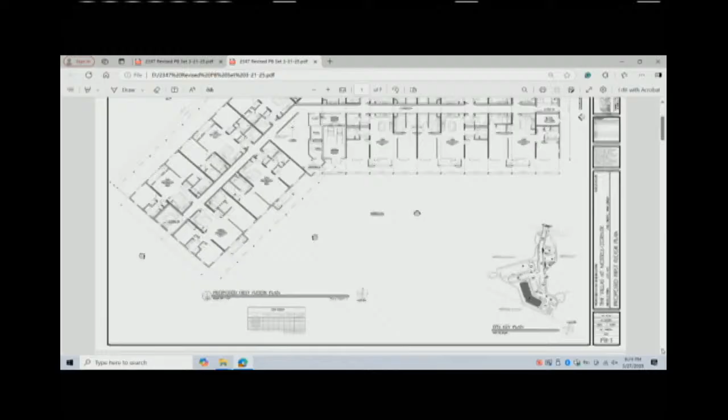We'll go to the next floor, please. The next sheet. Right in here is that trash room. You can see this trash room is a fairly large space. It has 2 trash chutes to allow for garbage to be brought down. Larger items such as cardboard boxes would be typically stored in this room and taken down separately by the maintenance person. There's a centrally located elevator that makes ease of access to both wings of the building.

There's a large open community area in the center of the building with access to it. All of the units are handicap accessible. The entire building is handicap accessible, ADA compliant. The elevator is a stretcher compliant elevator, for ease of emergency personnel to move patients or people in and out that are incapacitated. You have a 3-bedroom unit over here, a 3-bedroom unit over here, and the mix of the units is all interspersed throughout the building.

We do have a total of 14 affordable units throughout the site. The 1-bedroom units are approximately 759 square feet. The 2-bedroom units range from around 1,230 square feet to 1,460 square feet. And the three-bedroom units are approximately 2,040 square feet. So each of the units have open kitchens, large living spaces, more than adequate size bedrooms, very comfortable living areas throughout this building as well as the next.

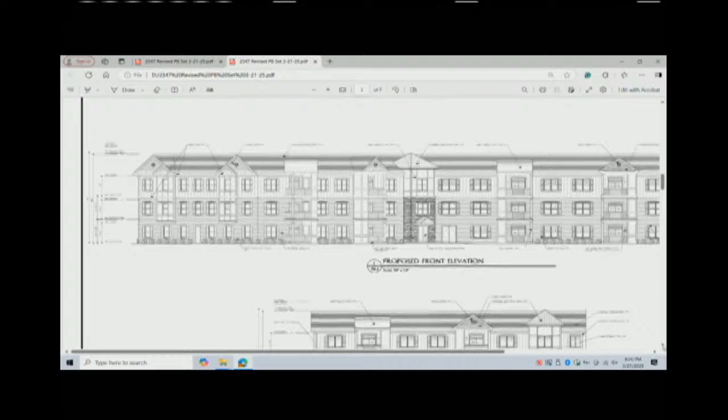This is the facade facing Madison Crossing. As you can see, very similar with the different breaks of materials, different color tones, all in the earth tone palette. We have the recessed balconies in here. And someone had asked a question about the air conditioning units. In these little areas here, these little closets per se on the balconies. And inside those closets are heating and air conditioning units, typically called Magic-Paks.

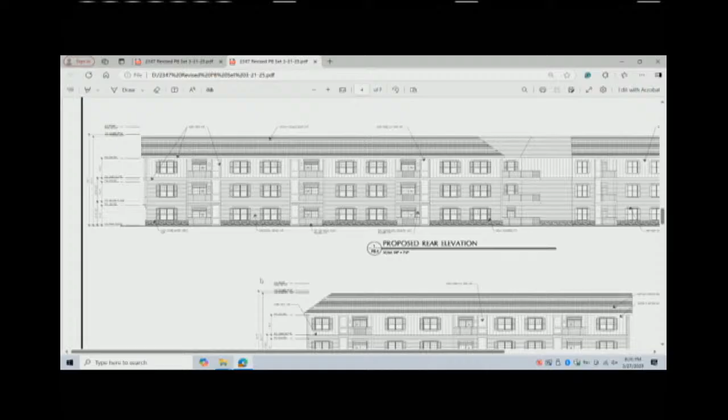They grab their fresh air from here. They're not unsightly. It just has a louver or a grill on the face of the wall that's painted the same color as the face of the wall, and it blends in with the facade. All 4 facades, again, carrying the same colors and materials throughout. This was building 1 for everyone. If we could scroll to the next building, please.

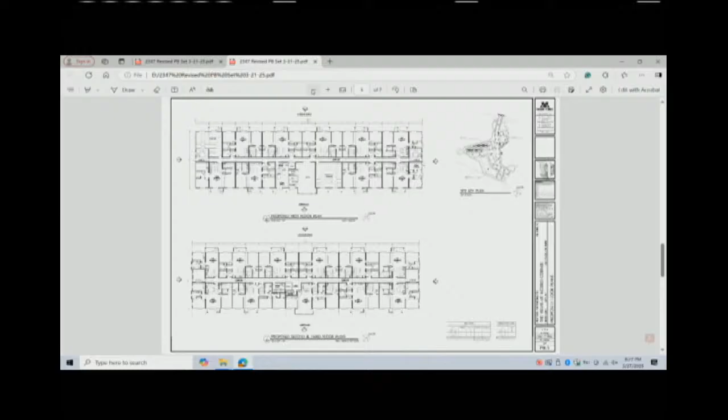And here is building 2. As you can see, it's just a standard rectangular building as opposed to the L shape. This is located on the western portion of the property. And this building here is approximately 54,434 square feet. There's 18,250 square feet on the ground floor, 18,092 square feet for the 2nd and 3rd floor. This building contains 31 units, where the other building contained 39. We have 2 one-bedroom units here, 20 two-bedroom units, and 9 three-bedroom units.

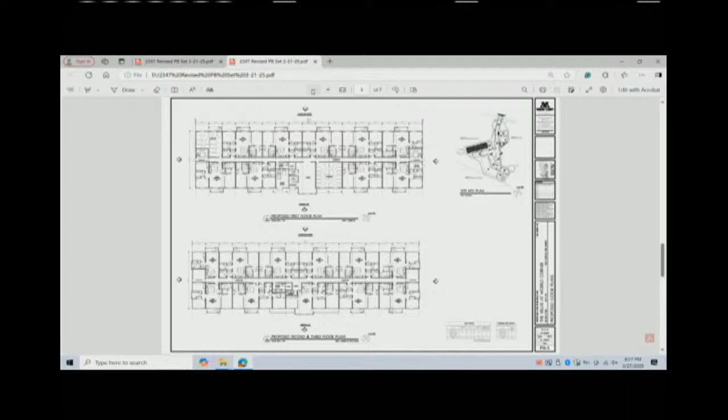This building, if we could just zoom in here, please. This building also has a centrally located entrance at the ground floor, adjacent to a mail room, package room for the occupants. We have a large lobby area for lounge space for the occupants to come down, use their computers. We have a centrally located elevator again to access both wings of the building. And what's different here is we also provide 32 storage units. So we have approximately 16 bins here, 16 bins here.

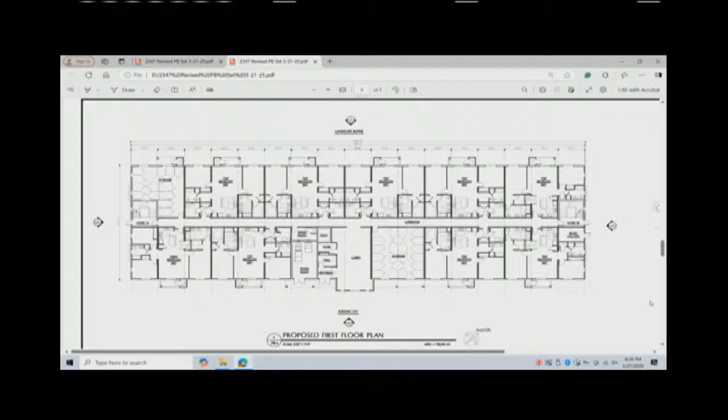Again, this building is fully sprinklered. It's fully handicap accessible. All the units have been designed to be handicap accessible, as well as all the amenity spaces. If we can just scroll to the next image, please. And again, you can see this building is the same architecture. We like to call this a modern colonial appearance, where we have a lot of colonial elements incorporated using multiple different building materials to give it a more modern and contemporary look and feel, yet still being contextual with the rest of the Township of Old Bridge as far as their style of architecture.

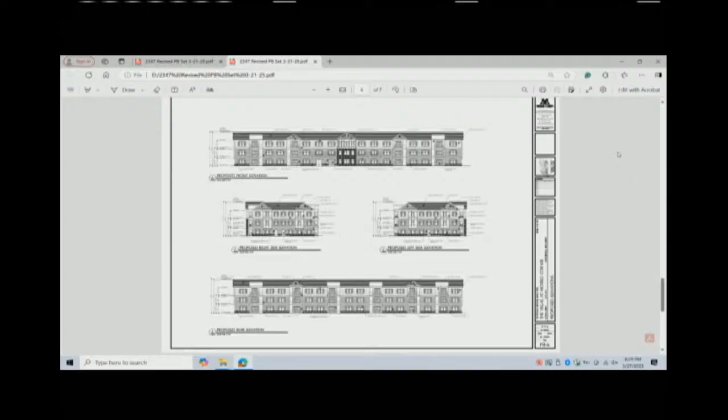As I had indicated, the highest point of this roof is 41 feet 7 inches. And the unit sizes are all the same. It's 759 square feet for a one-bedroom, 1,230 to 1,460 square feet for two-bedroom, and 2,040 square feet for three-bedroom. If you can scroll to the next page, please. And the third building on this site is the clubhouse, which is located at the northernmost part of the property here. Can we just zoom into this plan, please?

Can we just zoom into this area? Wherever you'd like to zoom in is fine. So this building is an amenity to the community. This building will be used primarily for the residents. It will not be rented out. This will be just used for the residents of the community.

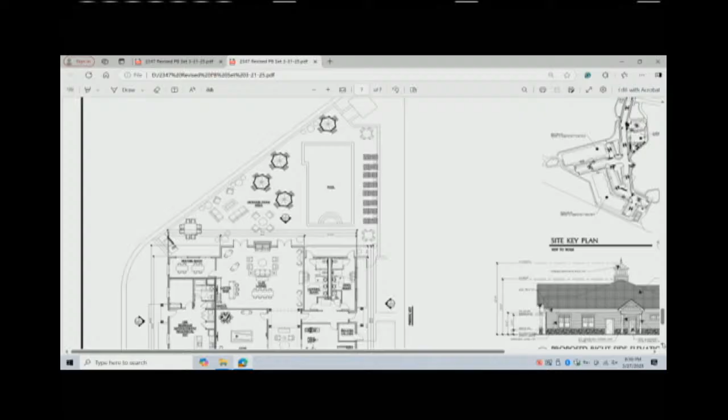This building is a one-story building that is 4,834 square feet. It also, in this area, contains a one-bedroom unit. This one-bedroom unit is for the on-site maintenance person that's going to be living here at all times, so that way he's on site if he's ever needed for any purpose. Can we just scroll up a little bit so I can give a little more of the amenity? Thank you.

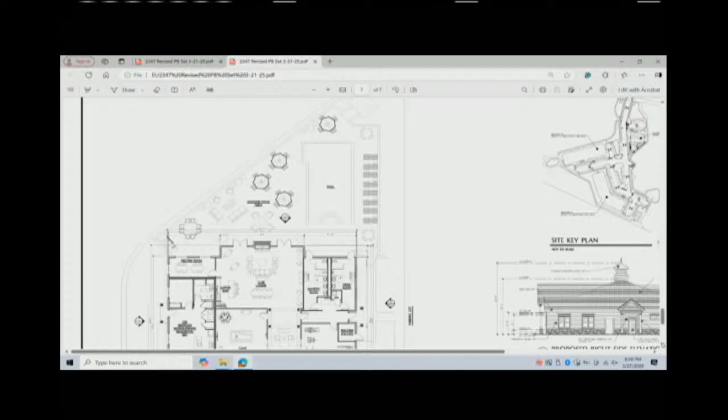The rear of the property you can see is a pool with some lounge area for the residents as well. So you walk into this building with a central entrance area. You have a leasing office and back space. We have a community lounge area here. We have a community lounge area in the back with card tables, a coffee area.

This is the residential unit as well. We have a gym space, yoga studio, and multiple bathrooms that could be used for both the interior occupants and the exterior occupants, and a small meeting room at the back corner.

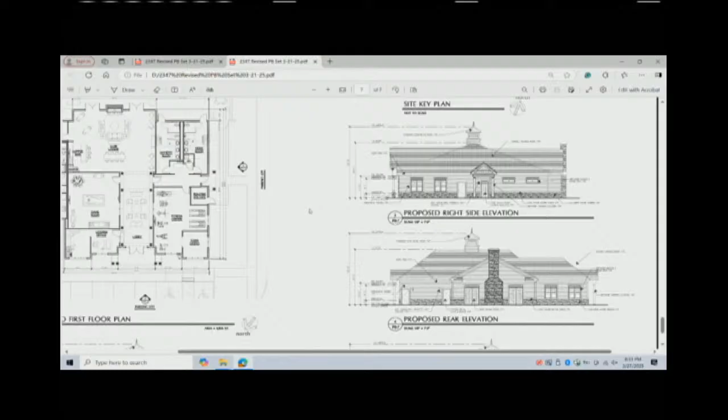Can we just move over a little bit so I could just see the elevations? Great, thank you. So these are the two side elevations. I think it's down below. Yeah, if you could, there it is. This little guy right here. So can we zoom down into here? Yep. Just scroll down to the bottom of the page right in that area.

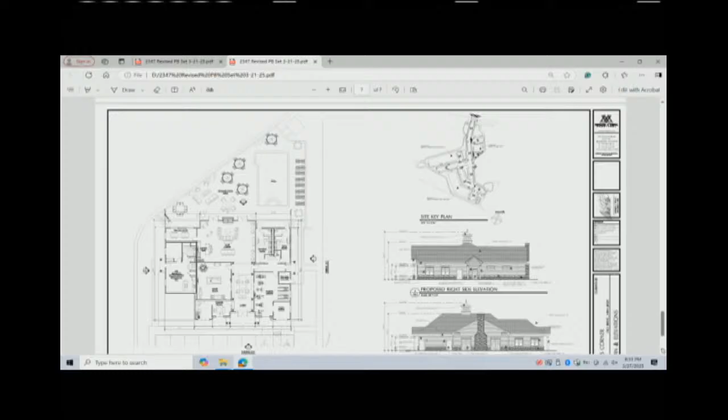Great, thank you. As you can see, the building is a one-story building with a little more decorative hip-style roof to give it a little more differentiation between the other buildings, but still carrying the same architecture through with a rusticated base, vertical cultured stone elements here, accented entrance with columns and a portico with a pediment, horizontal siding, and asphalt shingle roof. This is a small canopy on the left side of the building.

That's the entrance to the residence here for the maintenance person. And we have a small decorative cupola here, again, just to add character to the structure and to help differentiate it from the other buildings. The other three sides of the building, again, are common design elements as the main facade with horizontal stone, horizontal siding, asphalt roof, stone fireplace for the interior space, and again, a complete complement for the other two buildings. That would be the end of my testimony.

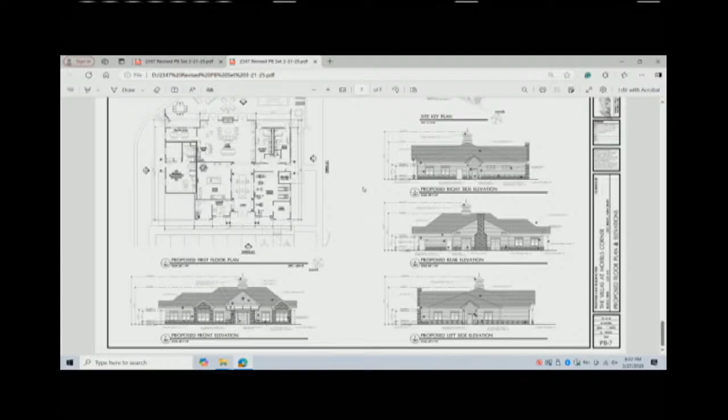Thank you, Michael. I have no questions for Michael, but he's available to your professionals and the board members for any questions they may have. Okay, let's open up for the professionals. Any questions, comments? I don't have any questions. I don't have any questions, but I'm sure you will be willing to work with us on the materials when we're going through the compliance review stage.

Absolutely, Vina, yes. And from what I understand, the recessed balconies, you have looked around for other projects in Old Bridge, the recent projects, and that's where you got the idea from, I'm sure. Yes, we've done many projects in the township. We've had the direction from the boards previously to kind of look around town, see what's being built, and complement those buildings. So I want the board to hear this because we have been working with architects.

Some of the buildings that were designed, especially the ones that were part of older GDPs, the ones that were approved like 20, 25 years ago, their architecture style used to be the typical garden style apartments, which were the planning of the 80s or the 70s. And we are working with architects on any residential development that comes in to modernize them in terms of the architecture, the look, and the architectural features that are being used. So Mike has worked with us before on many other projects, and for his testimony, he is ready to work with us in future to finalize these elevations.

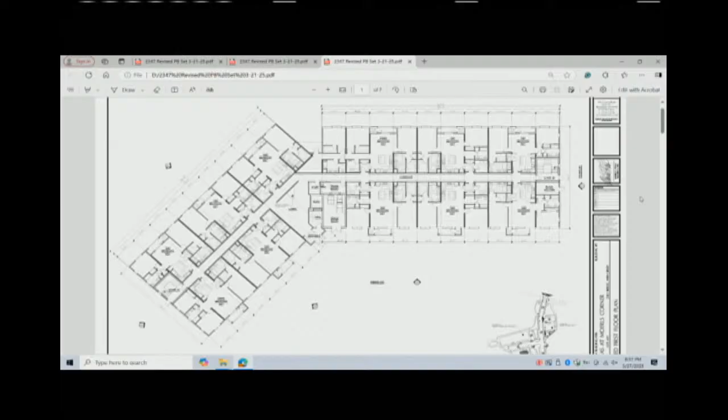Dan, any questions? Okay, anybody to my left? Ed? You're up. Can you go back to the drawing that shows the back elevation of the building that's facing the existing residence? That would be sheet 4. That's okay, I get it. There you go. Yes, it would be the one up top here. The one up top. And how many units are in that building alone?

There are 1, 2, 3, 4, 5, 6 units facing the rear property line, but there are only 1, 2, 3, 4 units that are up against that property line. Because remember, the building's like an L, so it angles away from the property line. Yeah. So there are 4 units that are parallel to the rear property line. Do you have any idea, is it on the right or on the left side of that building? It would be on the right side.

On the right side. So as I'm looking at these. Yeah, so this is, again, it's like a V shape, an L shape, so it's kind of hard looking at it in perspective. But again, it's going to look like this if you're looking at it straight on, where everything is straight at you. Right. This is off on an angle.

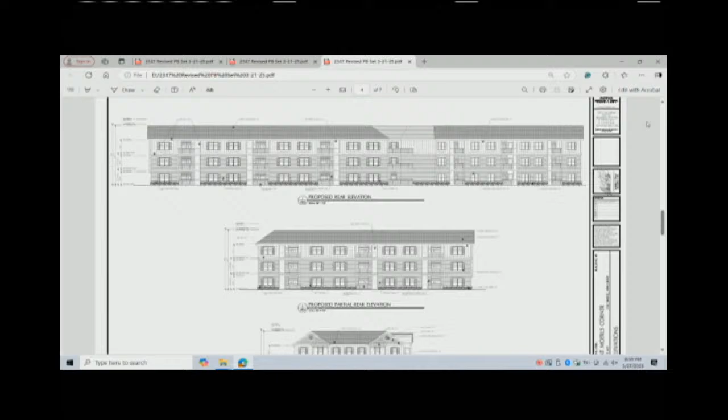Right. Now, there's access from those back decks to that 20-foot space between the retaining wall? No. There's no access? No, there's no access. From those balconies? No, not from the balconies up above. We have a fenced-in area along the ground, so no. But a person could easily step over that into the backyard on the lower level to gain access if they wanted to. Well, it's a 42-inch high rail. I'm 58 years old. I might have a little hard time getting over it. Yeah.

Gotcha. I just have to, thinking out of the box here. And the air conditioning units, it's one unit, but we're talking about 6 units now, 6 air conditioning units that will be functioning all the time. So you increase the level of noise by 6 as opposed to just 1. So you have that noise that is cumulative if they all run at the same time.

And you're looking for a variance because it's 50 feet. Okay, and you're looking for a variance because it's now 50 feet to setback, but you're going to have, what, was it 37 feet or what? Mr. Turner had spoken to the purpose of that based upon site conditions. I'd rather have Mr. Turner respond to the location of the building relative to the property line. Okay, well, there's an item here that has to be, the setback is an issue.

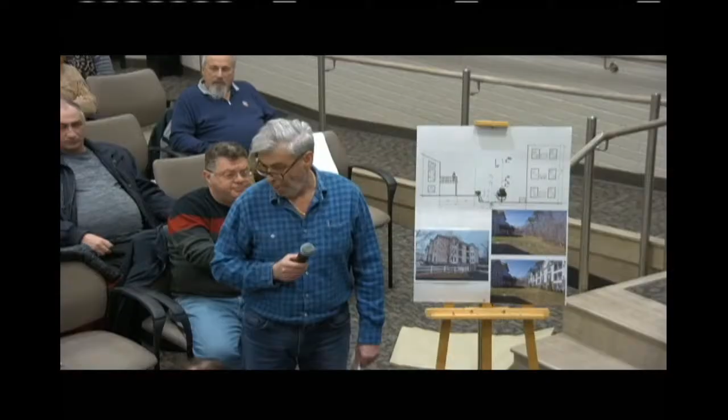No, the overall plan, the site plan. Or do you want the cross-section? Yes, the first cross-section, I'm sorry. May I use your pointer, please? Thank you. There's mine. Not mine, you can use it. Is it the pointer? Would you help me, please? Thank you.

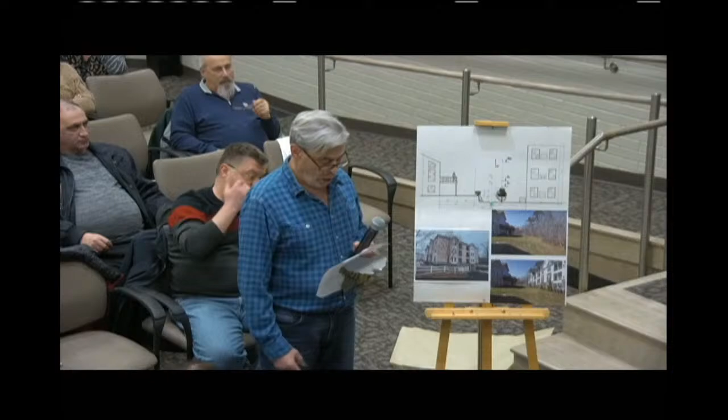Works. Thank you. Okay, I have prepared a presentation based on the proposed development outline in the Vision Allbridge Major Site Plan and would like to highlight several key points for your consideration. Upon reviewing the drawings, which I had, I have noted that the actual distance from the decks to the boundary line is only 13 feet, not 25 feet as proposed. The new building will be just 50 feet away from our houses, not 60 feet, as indicated in your plan. I like your picture, but this picture...

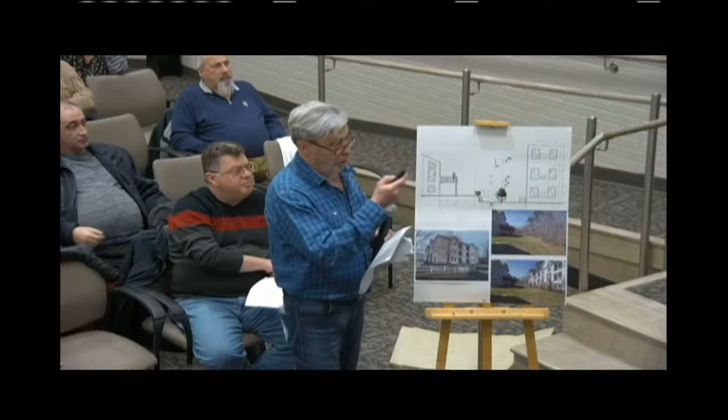Was survey work done? Is this man a surveyor, a professional engineer? He has not been asked to be qualified as a professional. He's speaking as a member of the public, and it's a lay opinion that he's providing as testimony. So how were the measurements taken? Were there survey markers utilized? I have a master's degree in civil engineering with 20 years experience in my former country, and here I'm 25 years in the real estate business. So are you a licensed engineer in New Jersey? I'm not, but I'm living by this development and would like to bring all points I have.

You can, but I have to protect the applicant, since you're giving out measurements and I don't know how you came to those numbers. I believe the board's supposed to tell us what I should do next. You can provide lay testimony because you're not qualified as an expert. If you are going to give specific measurements, you have to be able to justify them. If you say it's 15 feet, you can say, I went out there with the tape measure, it's 15 feet. If you're estimating, you have to identify that. As I mentioned here, I used the drawing which was available in the planning office for me, and I saw those drawings and took all sizes from those drawings.

I never saw this plan before. Yeah, this was just presented. It has not been identified. Just today, exactly. No one's seen that except for just today. This is what I just said. Did you make a statement earlier that the new building would be 15 feet from your building? 50, 50. 50 feet? 50 by your drawing. Okay. I thought it was 15, that's why I asked. 50. Okay. Not 60. As it shows on your drawing.

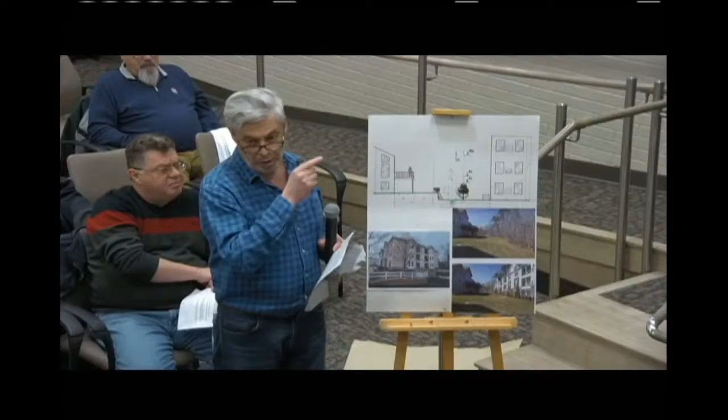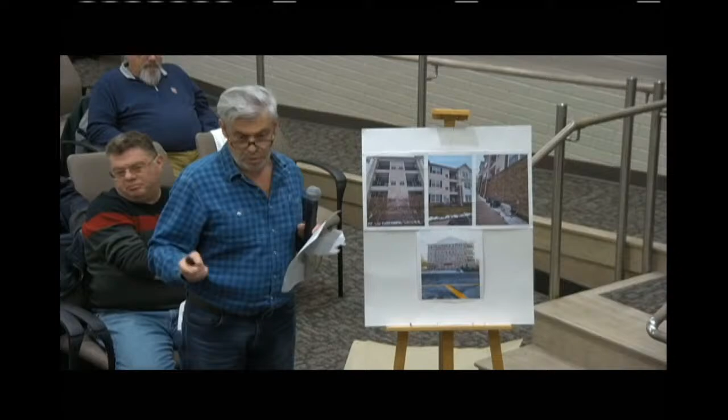Okay. The proposed building will also have common area elements, AC units, which are usually located on the back of the building. And these units give much more noise than units inside the balconies. On our property, we also have three-floor buildings. And these pictures will show you how many units we have on the side of the building, which cover hallways, corridors, and common area elements of those buildings. And it's gonna face... Let me just slow you down for a second. You're presenting the board with photographs. We're going to mark those as Exhibit O-1. And can you please identify what is depicted in those photographs?

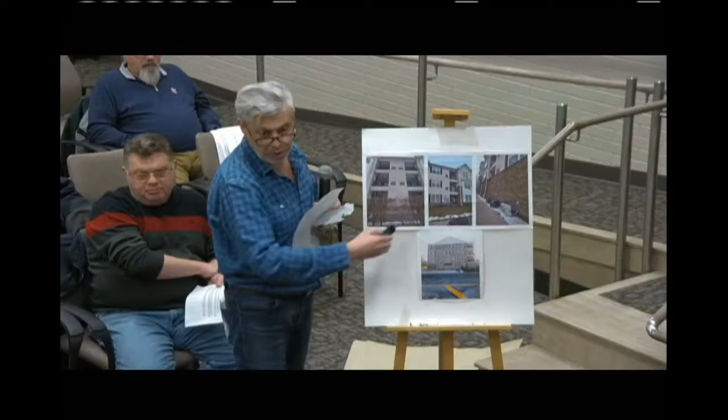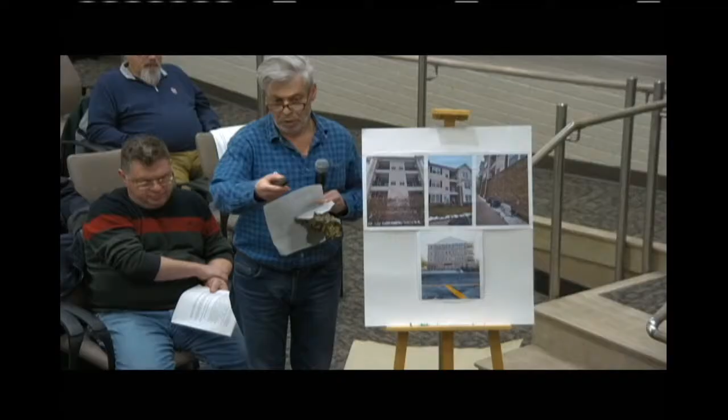Well, first off, did you take those photographs? Yes. When did you take those photographs? In our development, from a building similar to this, three-floor buildings with the AC units on the side for the common area elements inside the building. So I'm trying to get your testimony out, so please, I'm not trying to interrupt you. I understand. So those photographs are buildings within your development, the adjacent development? Correct. And you took those photographs, and were they taken recently? Within the last month, or a year? It was taken at the time of the first meeting a couple of weeks ago. Okay. Thank you. Continue. All right.

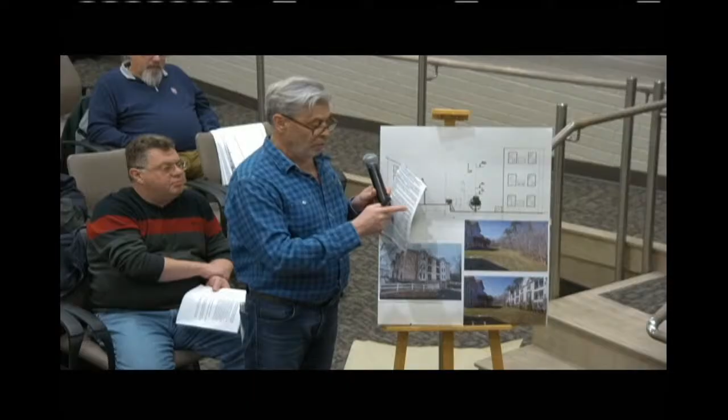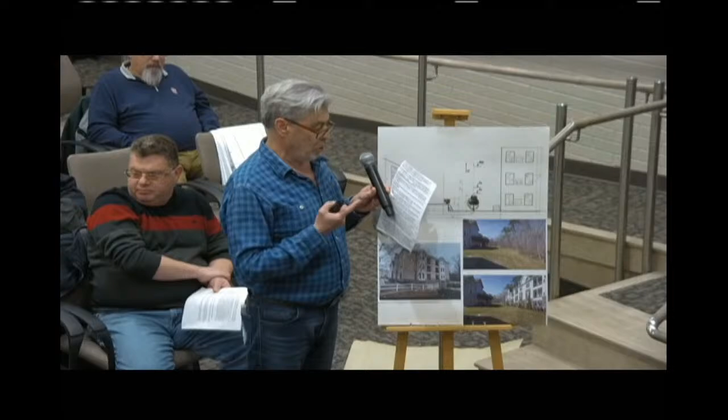And these units are really big units, like your home units, probably not like balcony units, and it's gonna impact us definitely. The developer plans to plant these trees, but I urge you to consider the following details. The drawing which I saw shows us 27 red cedar trees with a planting height of 6-7 feet, which will mature to a height of 25 feet, growing only 1-2 feet per year. Then, just 5 white oak trees, with a planting height of 12 to 14 feet, which will mature to a height of 60 feet, growing only 1 foot per year.

And the third one is 4 red maple trees, with a planting height of 12-14 feet, which will mature to a height of 60 feet, growing 2-3 feet per year. Total of the trees facing our buildings is just 36, compared to 172, which was presented by the architect on the drawing I saw.

Now, based on this drawing, they show us a height of 12 feet, correct? Retaining wall. Now, this size is very similar to the size of this tree, which is also 12 feet. As I mentioned to you, they're planning to plant 12 feet or 6 feet trees. This is going to be the first year. This tree is going to come in 30 years. Take a look here on my drawing. You can easily see the same tree.

Let me just clarify for the record. So now, as part of Exhibit O, on the back side, in addition to the photographs, you have a hand-drawn diagram. Did you draw that diagram? Yes, I did. Okay, and what is depicted in the diagram? It looks to me that it is a similar type cross-section as what's been identified as Exhibit A3, but to your hand drawing and your dimensions that you're proposing, correct?

This is made in scale. 1 inch equals 5 feet. This is the 12 foot tree right there. Next year, it's going to be 15 feet. Take a look here. 20 feet and 35 feet is going to be only in 30 years. And if you stand on our deck, you're going to see all of them, even during the first 15 years.

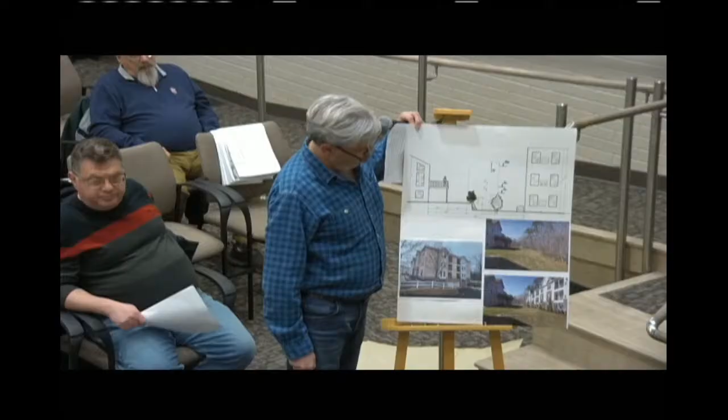And just how it's drawn in your depiction, and I understand why it was drawn this way, but I just want to clarify, it shows the retaining wall as originally proposed, not as proposed in Exhibit A3, where they have now proposed to move the retaining wall. And I understand you didn't know that at the time, but I just want to clarify for the record, that drawing shows the original position of the retaining wall?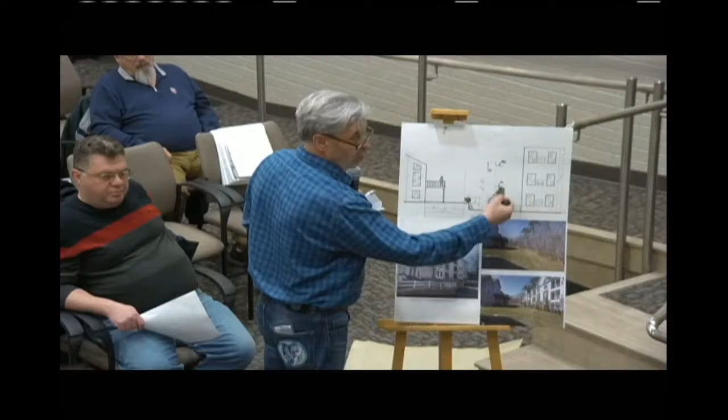Yes, but you see, I took my tree, which is the same size as theirs, and put it here on the top, as they show you. And this is the height of the tree right now at the time of planting. Okay, now the next.

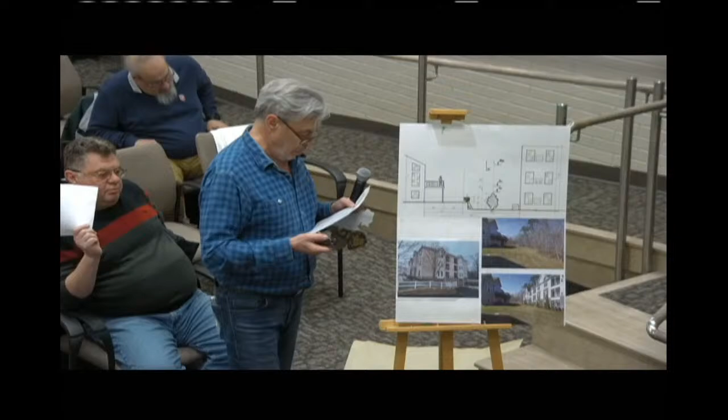These new trees will not be sufficient to mitigate noise and lighting impacts. We request the preservation of the existing wood trees, which are 60 feet high right now. This is 60 feet in scale. If they put this kind of trees, it's going to look completely different than if they save these trees. But in this case, they need to move their building far from us.

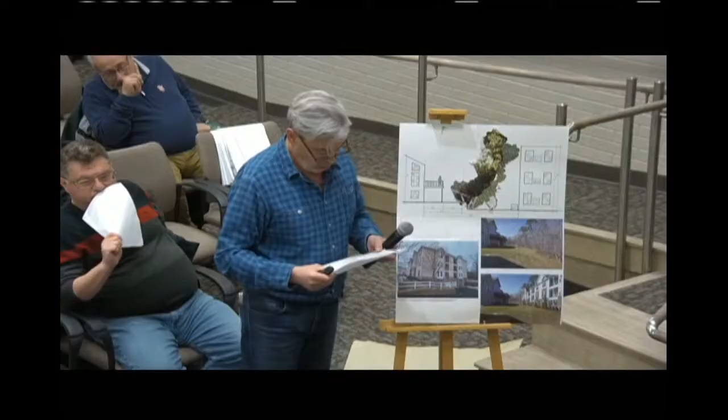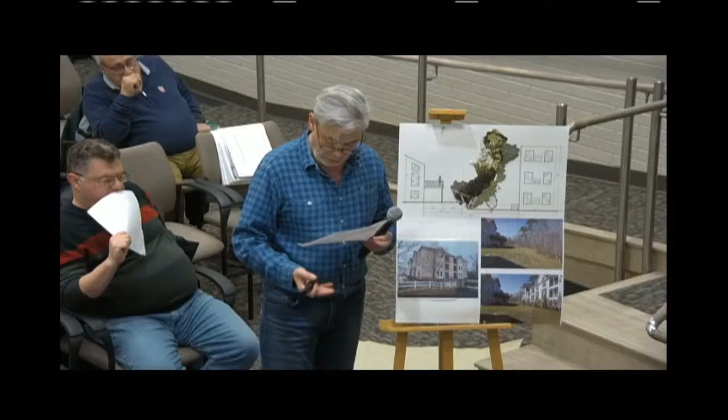Next, we ask that the proposed building be moved as far as possible from our boundary line. To achieve this, the developer can construct underground parking, as we have on our property, and in this case, they will save above ground parking space, and they can definitely move their buildings. Also, they can build an underground detention system or connect to the township's stormwater system line. This also will allow them to increase buildable area for the buildings.

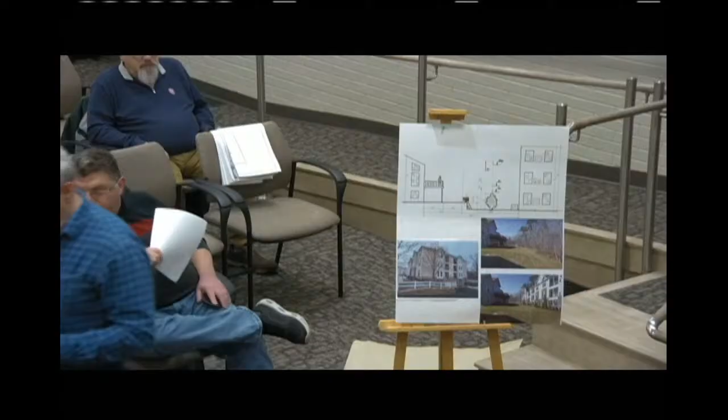We request that all construction be moved at least 100 feet from our homes in accordance with the zoning regulation. The proposed building can be moved closer to Texas Road based on 100 feet zoning data, rather than the current plan, which places them 230 feet away from Texas Road, bringing construction 130 feet closer to us. Thank you for your consideration of our concerns. Okay, thank you. Is there anyone else who would like to?

Actually, Mr. Chairman, I did want to just mention one thing. Before you leave, Mr. Lachowski? Yes. You did hand out a handout that was left on top of the dais for the board. Are you looking to submit this, or is this from you, or is this from somebody else? Number one, this is mine. This is the second, third and fourth speakers' speeches. And this is the signature of each resident with the picture. Okay. So this is from multiple members of the public who are going to speak.

Yes. We need to give a copy of that to the applicant's attorney. Do you have a copy, or do you need one? Okay. All right. Thank you. In your testimony this evening before the board, are you making any specific reference to any of the documents in here? Yes. Okay. Can you just identify which ones they are? I just want to make sure that's clarified, so the board knows what it's looking at. This is all signatures from all members. Okay, so it has signatures from all the members, which will affect everybody.

Yes. And this is mine, number 1. Next is going to be this one, then this and that. This is mine. Okay, so the other people, they show... this page is mine. It looks like it's the fourth page in, dated March 27th, 2025. My name is on it. Okay. Well, I just want to make sure there's a record being kept, so I'm just trying to protect it so that everyone understands.

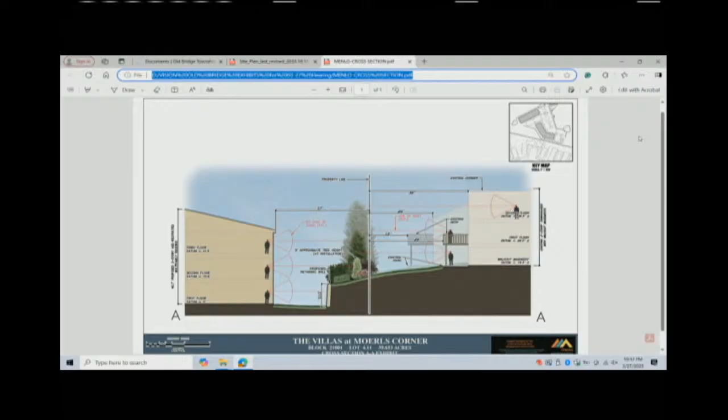So think about this. If these roots come on, would it destroy a retaining wall or not? Think about this, right? Another way, 40 to 60 feet tall, right? And how distant from this deck to the tree? Tell me. 15 feet, I guess, right? Or 13, I don't know. 13, right? So if this tree falls down, guess what happens to the side? So what's the distance supposed to be from the tree to the deck? Think about this. So my understanding, this is not suitable for this design. That's what I wanted to say.

And also, what I'd like to add in the finish, we will not give up on this. We will address the press, the news, and we will fight for this to make sure it will be a right and nice decision, to make sure all people will be happy, not only these people or us people. And also, not my concern, but look at this person on the first floor. What would he see? A retaining wall, right? He's supposed to be a very happy person, right?

That's what I want to say. Thank you for your concern. I guess you're gonna make the right decision. And I heard people from the other side tell us nice fairy tales, but it's not nice fairy tales. It's just the opposite. Thank you.